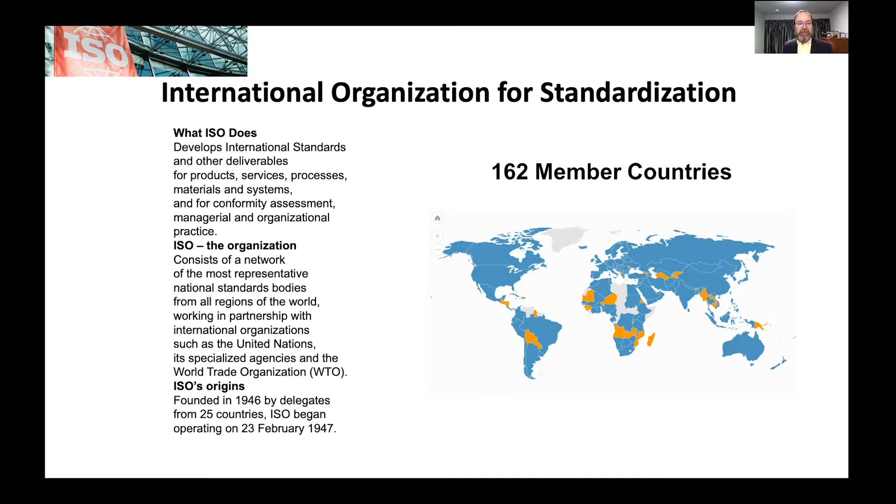To start off with, just a quick comment about ISO, the International Organization for Standardization. I suspect many of you are familiar with ISO. It is an international organization that develops standards at an international scale. It consists of 162 member countries and a really strong foundation of national standards bodies from around the world coming together to promote the very best in standardization. Inside that framework, ISO TC 184 SC4 industrial data is the committee that I'm the chair of. And the focus of this committee is all about the product and the product life cycle.

You can see there we have 769 standards in scope with 32 projects underway, multiple groups that are working with experts from 17 nations directly and then 14 nations that observe. And I'm pleased to share that we recently moved to 18 participating members with the inclusion of Canada joining us here recently.

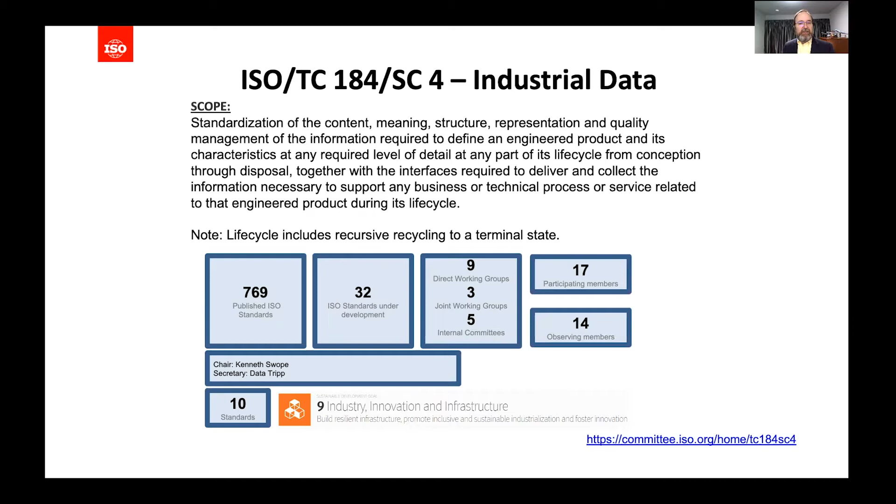Just a little bit about the standards that we manage in SC4. You can see here they're organized, and what I've done here is put them in a value stream context. This one resonates, I think, with many who deal with the product design and the product data in manufacturing. Product definition, visualization, factory integration, and digital manufacturing with foundations in data quality and product properties and classes.

The standard that probably we're most famous for is ISO 10303, commonly known as STEP. The STEP standard has many parts that support the definition of the product, the communication of the product design from an interoperability perspective across domains and IT applications and the supply chain. Chances are, if you're in manufacturing, you have exchanged a STEP file with someone in your supply chain.

But then STEP is not the only thing that's in the committee. We also have 15926, which is a standard for the oil and gas industry, and really extends the idea of STEP to the classification and identification of components in refineries, on platforms, in large asset industries.

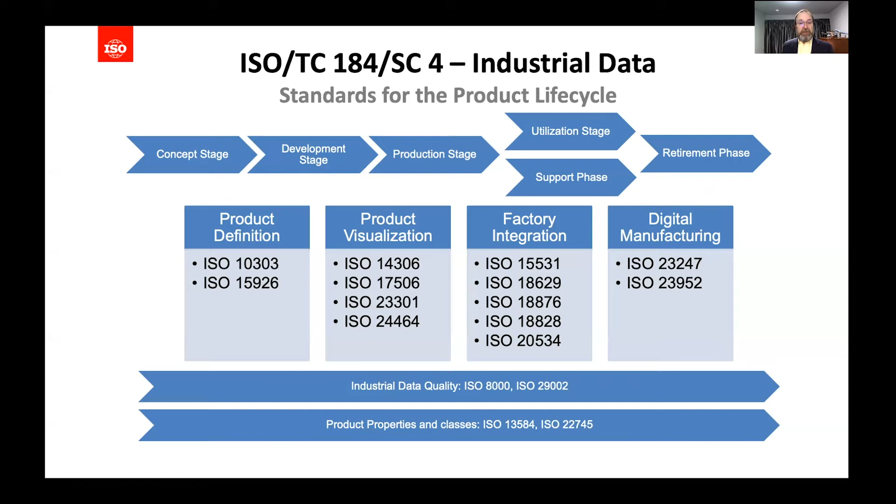It forms a quality management system for data, if you will, and then product properties and classes with 13584 and 22745, which are largely databases, if you will, of products and their characteristics that are available for reuse and public dissemination. But turning my attention to 23247, I'm really excited and would share with you something that I think would apply directly to anything that you're working in a manufacturing context.

We've known for a long time that the machines on a factory floor need to be able to communicate, and as they grow smarter, they grow more instrumentation, more ability to measure, monitor, provide feedback, adapt real time. There was a need for standardizing the communication framework for them. So ISO 23247 shows a technical framework and then an implementation approach.

And it provides us a means for establishing how the communication should occur at each level, from the physical device itself through the data collecting and controlling to the distribution and communication, and then finally to the supervisory or control system. And you can see an implementation shown here where different machine types are characterized in the observable manufacturing space that feed into manufacturing systems, manufacturing operations systems, and then supervisory control systems that feed factory operations and leadership decision making.

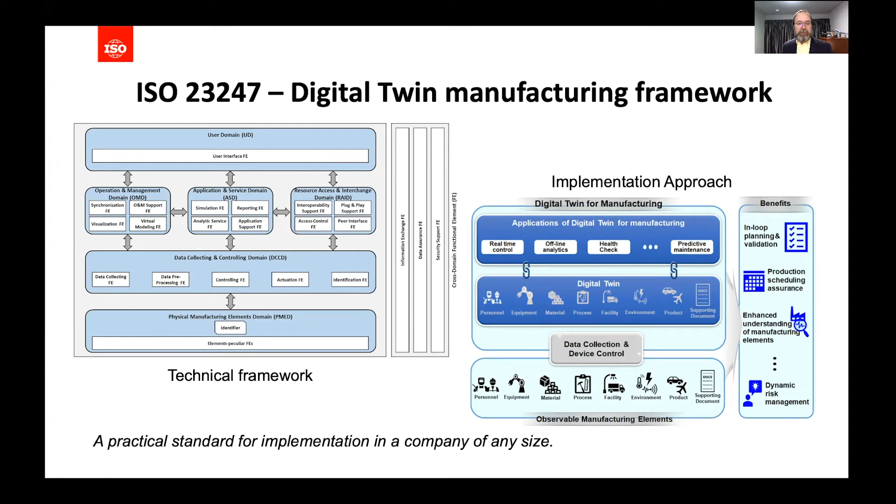We're actually demonstrating this, and we've got two examples that I'll show. The first one here is actually pretty close to home for me. Boeing is sponsoring research with the BARC Lab, which is the Boeing Advanced Research Center at the University of Washington, and several companies that are participating in the research. And the idea here is, if you're familiar with how aircraft are produced, you know that very large machines are often used to assemble wing panels and create aerostructures.

With this example, instead of a very large, very expensive machine, we instead are using 4 robots. And the 4 robots are very flexible, they're very dynamic, and they coordinate with each other to build a small wing panel assembly for this demonstration. They are Kenny, Kyle, Cartman, and Stan. And what they're doing is proving the test case here of dynamic scheduling.

And what happens when one of these robots suddenly goes offline for a manufacturing related issue, or the robot itself, perhaps it breaks some component? We don't want to lose the investment we've made in the assembly so far. So in this example, the robots self-monitor and report back to a supervisory control system that reallocates and retasks the other 3 robots to complete the jobs.

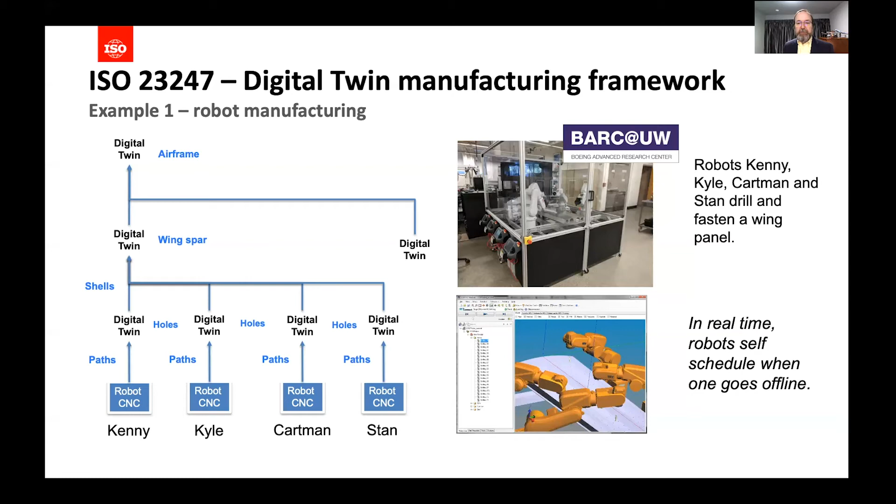My second example comes from machine tool cutters. So Kennametal is doing this research, and in this case, what we're doing is demonstrating the use of the standard for machine tool optimization and predicting when a cutter needs to be changed out. And so we're getting the most use out of a cutting tool, optimizing the cutting tool paths for the most high quality geometry in cutting, and providing real-time feedback to a supervisory system and data for applications like AI and machine learning.

And across the bottom here, you can see the steps that are taken, going from G-code operations, which is the actual machine tool itself, through, again, an MTConnect communication protocol for the streaming of the data to a real live model of the same part, and then applying the results of the cutting tool model, and then STEP-NC, adapting the cutter paths and providing the data back to the machine. You can see here a possibility of 15% increase in tool life by using this process. And of course, we're just in the example stage here, but I'm truly excited about this.

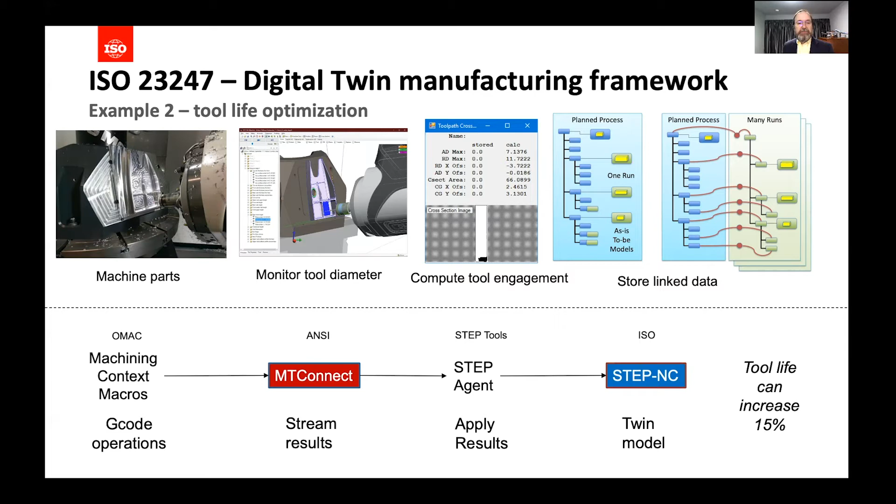We've been modeling for a very long time, very expansive, very complex models that we use in the development of products. And so what we're looking for in the future is how to fully leverage and utilize these. So going from 3D model-based definition to a persistent digital twin, for example, going from change paper that, quite frankly, still exists in electronic records to a model-based approach with the utilization of more advanced COTS platforms. Really taking advantage of simulation and the Internet of Things to drive simulations and feed data back to simulations.

Looking at the bill of material and how multiple organizations take advantage of the bill of material for their use, not just product design, but the manufacturing, the service and support, and the maintenance of the product out in service. All the way to even technologies. We're taking advantage of more software as a service platforms, and cloud.

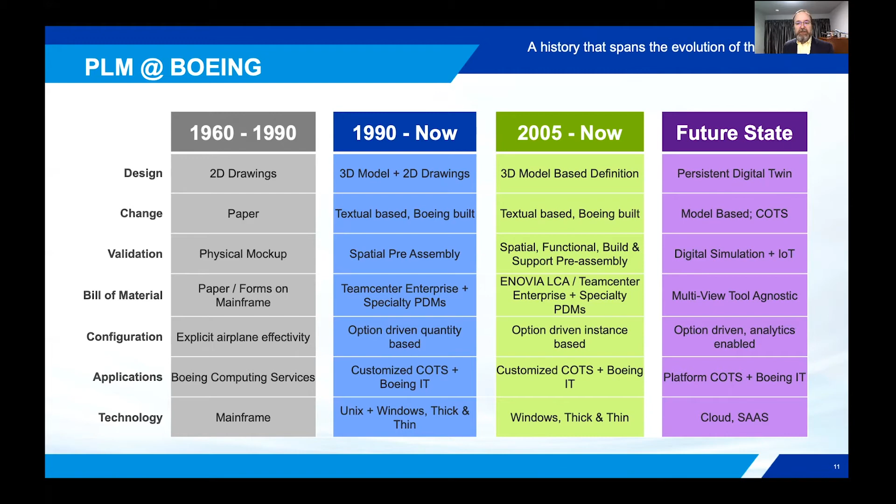So when we talk about going from now to the future state, you might ask, well, what is the role of standards in this? We talk about standards in a very particular way. I don't think it comes as any surprise that COTS platforms is the industry trend. Everyone is using COTS applications to further their work and to provide value.

And for the longest time, we talked about integrated architectures, where you developed a solution for a particular program or a particular product line. That's moving more towards platforms. So if you think about PLM as a platform, ERP as a platform, manufacturing operations as a platform, these now embody many services within those platforms, and it's all good stuff. The key is to ensure that we always have a way of integrating and accessing the data. And it's in this space that the role of standards really becomes key.

And on the right-hand side, you can see, for example, this is what we call a radar chart. And while you're not meant to read every dot that's on it, what it conveys is the set of standards that Boeing's been tracking for utilization in this space. And we have standards, of course, that we adopt directly. We have standards that we monitor. We participate in quite a few. And then, of course, there are some that we still continue to develop ourselves.

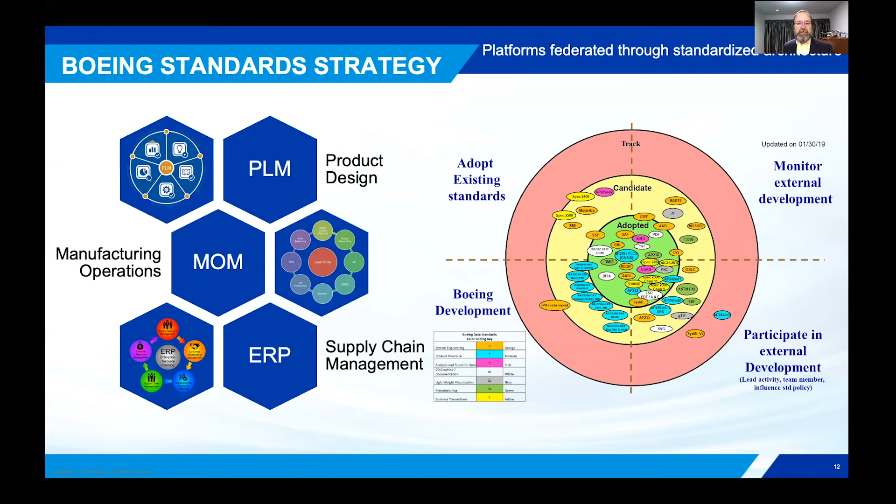But we also know that standards really require a village, an ecosystem of participants for a standard to really be the best. And the chart that I'm showing here is one that I've pulled from some collaboration that we do with PDES. PDES Inc. is an organization that we participate with. And in the PDES Inc. structure, there is this concept of user community, an implementer forum, and a standardization community. And the reason I bring it up and why it's relevant to our topic today is that you need all three for a standard to be really the best that it can and to serve industry requirements in the most efficient manner possible.

We'll begin with the user community. So, for example, I, representing Boeing in one of these groups, would have a set of user requirements and use cases that I need solutions for. That's shared with the standardization community. It's also shared with implementers, software developers, organizations that provide middleware. The implementers and the standardization community work with each other to build the most efficient standard possible to satisfy those needs. And then the implementers themselves work on best practices that will take those standards and demonstrate their implementation in their particular tool set.

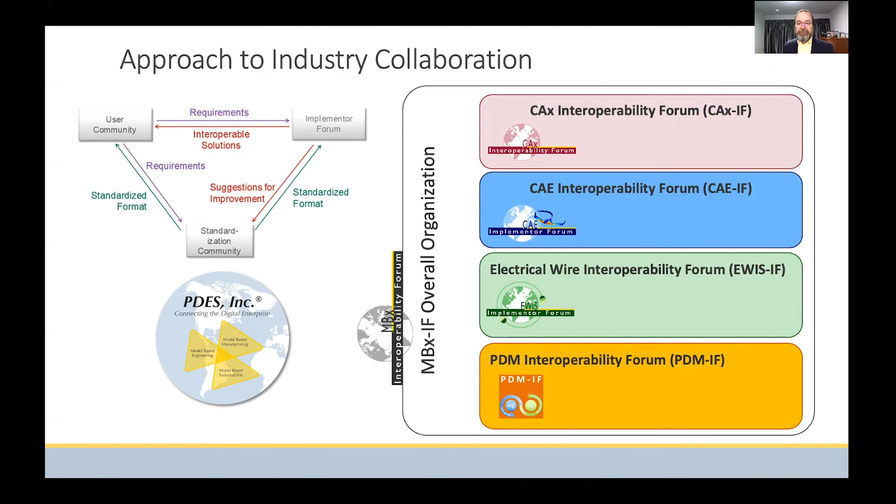So in closing, my three main points that I hope you got from my talk today. The first one is that standards exist in every aspect of manufacturing, whether you're building a design for manufacturing, you're building the product, you're trying to figure out how to construct that product, to manufacture that product, how to source that in a supply chain context. The standards are a key to simplifying your approach. By standardizing on how you're going to communicate, you actually enable value within your own organization.

The standards are referenced in most contracts. So if you look at your contracts, you'll note that there's probably some communication about how you communicate data up and down your supply chain. I would invite you to look at those. Oftentimes, they are something that you can leverage for your own use, and look at what kind of diversity of standards you're currently living with today.

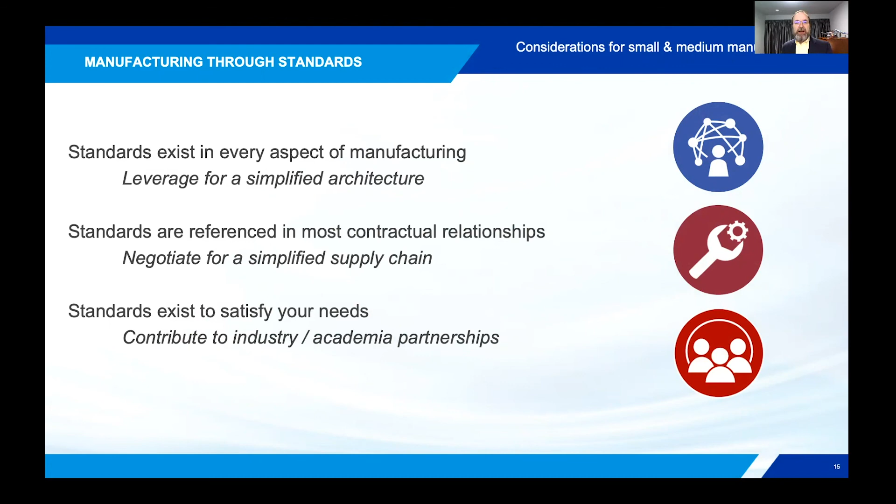And then finally, standards exist to satisfy your needs. And I hope you saw, in the way Boeing is looking at this, that there is lots of opportunity for not only using standards in your organization, but also contributing back. And there's many ways to do that. You don't have to be a Boeing to do this. You can join industry consortia, academic partnerships, and contribute to that knowledge base.